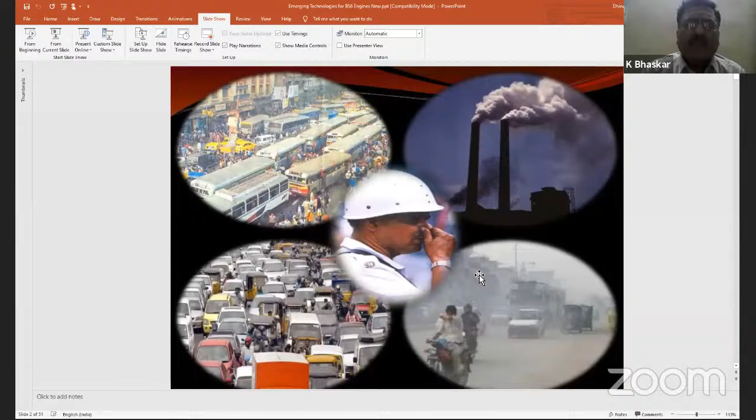It is not that only automobiles are giving pollution. There are a lot of industries also contributing, and the transport sector and places where combustion takes place are the main sources of carbon monoxide and oxides of nitrogen. So we don't want this. We are going to discuss how we can tackle this.

Before going into that, we must know what emission is. Anything which is not good for human beings, atmosphere, plants or animals, we call it pollution. Whatever pollutant comes out of the engine, we call it emission.

In SI engines, normally we have three major pollutants: hydrocarbon, carbon monoxide, and oxides of nitrogen. Please remember these three things. Normally oxides of nitrogen is denoted as NOx, meaning it consists of several oxides of nitrogen put together.

Then your diesel engine, the compression ignition engine, has one more pollutant extra: particulate matter, which is normally a solid form of soot. We can easily see black smoke coming out of the engine. When you see a public transport flooded with people, normally in the exhaust you will find black smoke. Why it is coming, we'll discuss.

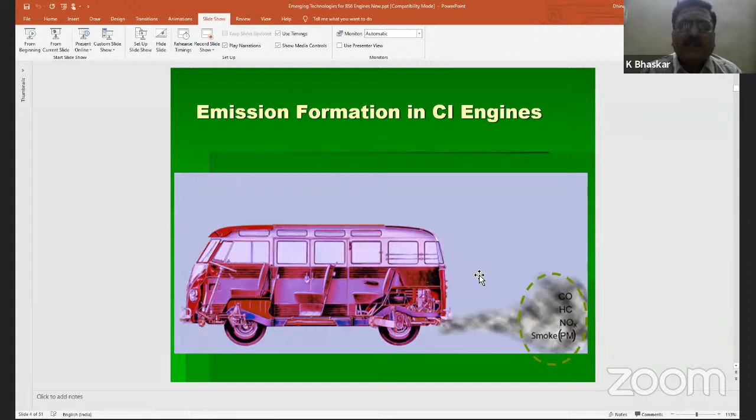Before going to that, what problem do these pollutants cause? Take carbon monoxide, the one culprit. We need oxygen - when we inhale oxygen, the hemoglobin in the blood is attracted towards it and carries the energy throughout the body. That is the purpose of inhaling oxygen.

When you inhale carbon monoxide instead of oxygen, or in combination, this hemoglobin in the blood has 200 times higher affinity towards CO than oxygen. That means instead of forming oxygen combined with hemoglobin, carbon monoxide will combine with hemoglobin to form carboxyhemoglobin.

It all depends on how much you inhale and how long you are exposed. When inhaling a small amount for a short duration, you will find a headache. With a large duration and large amount of carbon monoxide, it can go up to death. So it ranges from a small headache to death - please understand the significance of it.

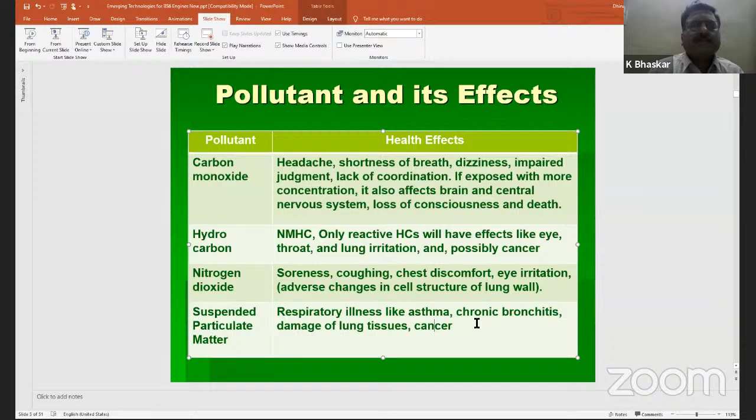As I said, particulate matter is a very, very dangerous component depending upon the size. When I say PM10, PM10 will be filtered in the nose's upper trap itself. PM2.5, when the size reduces to a quarter of it, then it can go to the lower respiratory tract. Then PM1, it will go to the alveoli - that is the lowest, smallest component which is available in our lungs. To that extent, it will go.

So when it goes very close to the smallest component, you will have a large amount of particulate matter of PM1 size. Then you will find part of the lungs will not be in active mode, so your respiratory system will not be functional to the expected level. Furthermore, PM0.1 will create a lot of problems which can go through the blood, and it can go to any part of the body.

To understand its effect, this is your human hair - human hair has 50 micrometers. Particulate matter of 2.5 - please understand the size of human hair versus particulate matter, it's very, very small. So when it goes into the body, it will have a lot of issues.

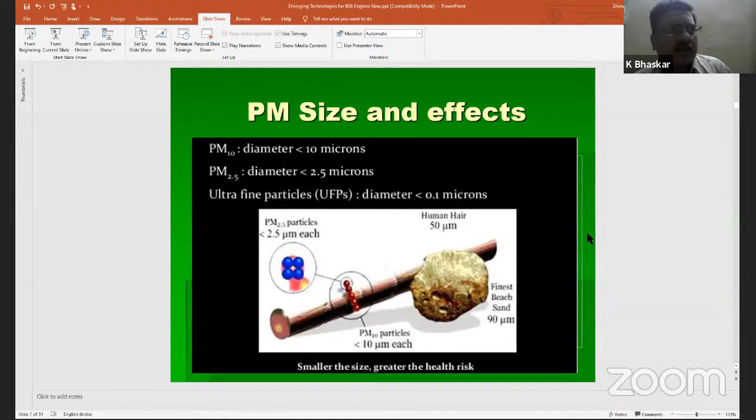Normally, who will be more affected? The traffic constables - traffic constables who are present in the traffic junctions, heavy traffic junctions. Normally the people will be on a rotational basis because they are the worst people affected by means of particulate matter.

On a whole, what happens throughout the world - the emission concept first popped up as the concept of emission control. Everything comes out in 1952.

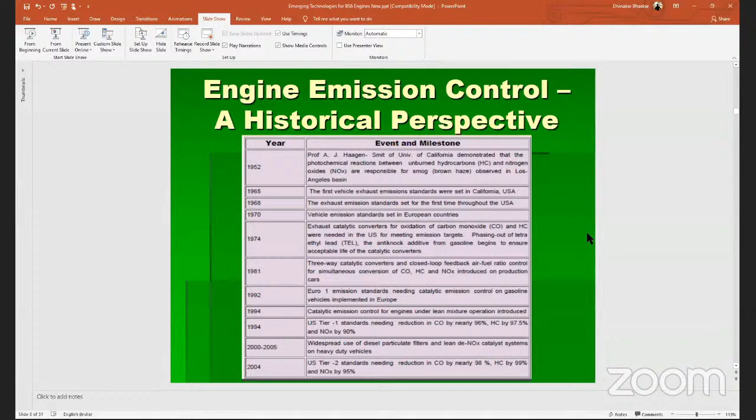1965, USA came out with the emission standards. Later, it started its journey to a greater extent. In India, it is around 2000, right? India 2000 is the year in which we implemented BS1, which is very close to Euro 1.

And you must know why we call it Euro 1. In the world, there are three major countries that formulate emissions, and all other countries will follow it, right? One country is Europe, another is US, and one more is Japan. We are following European standards, and we slightly modify them to follow the Euro norms based on our conditions.

Please understand, step by step only we have applied the emission norms. For example, Euro 2 was introduced in 2001, but only in Delhi, Mumbai, Kolkata and Chennai - the 4 major metropolitan cities. Later, 13 cities were identified, plus these cities. Then in 2005, Euro 3, the 13 cities plus Delhi implemented Euro 3.

The remaining part of India used Euro 2. In 2010 only, Euro 3 became nationwide. So please understand, only when we implement a new emission standard, it's first in the selected metropolitan cities, and we see the success. Then after seeing the success, they implement it all over the country.

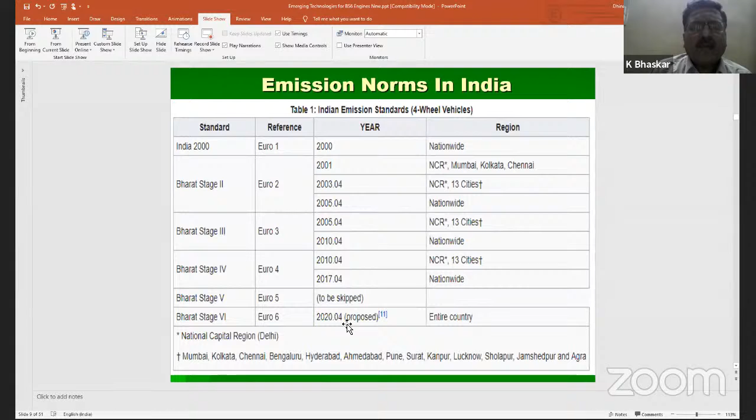One information you should know is Euro 5 we have skipped. Euro 4 is introduced in 2010. By 2015 we must have been in a position to introduce Euro 5, but the government and the manufacturers decided to work together and formed a committee, and they decided to implement it in 2020 nationwide, not in selected cities. From 2020 onwards, Bharat Stage 6 norms will be implemented.

So what is this norm? If you look at it, there's no big change in BS4 and BS6 with respect to CO and HC. But NOx is reduced. There is a new term coming up in petrol engines: particulate matter and particulate number. Please understand, there is a new terminology entering the emission norms from BS6 onwards.

Particulate matter for petrol vehicles - earlier, particulate matter was implemented only for diesel vehicles. Till BS4, we don't have particulate matter for petrol. Now only we have introduced particulate matter. And particulate number - the size, we should not go beyond this. That is also another parameter, the size as well as the quantity. Both are introduced because...

...for achieving Euro 6, one technology in petrol engine is GDI. What is GDI? Anybody? What is GDI? Gasoline direct injection, sir. Yes, gasoline direct injection. What do you mean by direct injection? We are injecting the petrol directly into the combustion chamber.

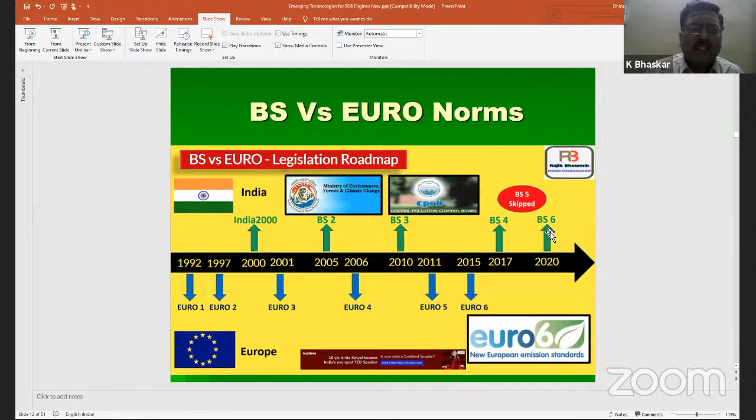Sometimes they may say 0, 0. The day may come, I don't know.

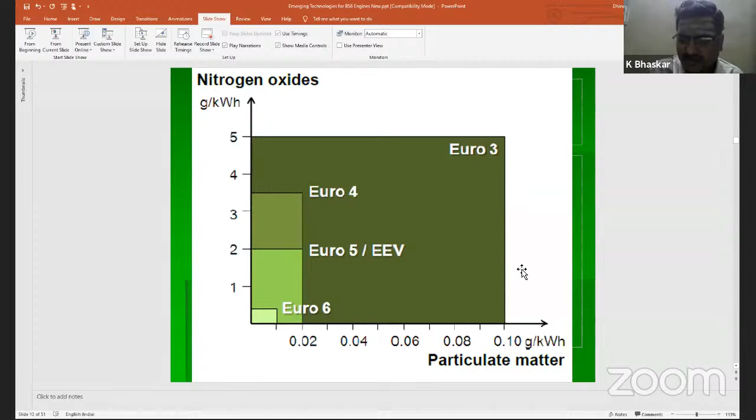This is again where we stand - that also you can look at from this. BS6 and Euro 6 are almost the same. There is no big variation, all the values are same. That is to ensure we are meeting the Euro 6 standards.

How is it tested? Have you tested your vehicle's emission? Have you taken an emission control certificate - anybody, two-wheeler or four-wheeler?

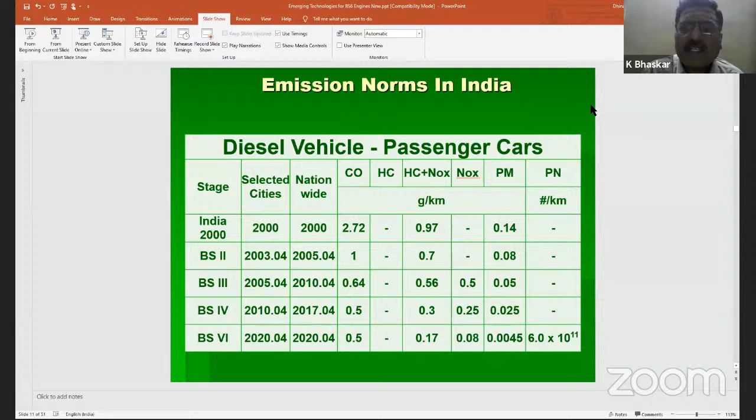In the petrol bunks also you can measure, and that will be an idling emission. That is no way connected to this. Please understand, that is no way connected to this. Right? That is what I am trying to say.

We are taking every detail from the European countries. European countries have their own roads. If you look at a highway, how many vehicles are flying on the highway? What type of vehicles are flying? How many two-wheelers, how many four-wheelers? What signals do you have? What is the driving pattern of the drivers? What is the maximum speed achieved on the road? You may have a vehicle that will go up to 200 kilometers per hour, but are you riding it on Indian roads? That will be different.

So statistical data will be taken into account—how the driver drives a vehicle on the road. A lot of statistical data is considered. How much, say when you take your vehicle from home to the office—you will start with idle, then accelerate, then have signals idle, then accelerate, maintain the same speed, then decelerate. All this acceleration, deceleration, hot idling, cold idling, all those things will be taken into account.

All this information will be put into the software, and this software will give you a driving pattern—the driving pattern of a driver for a particular vehicle. That is the driving pattern, which we call the driving cycle. On the x-axis we'll have time, and on the y-axis we'll have speed. Speed versus time. Is that clear? What does this driving cycle represent?

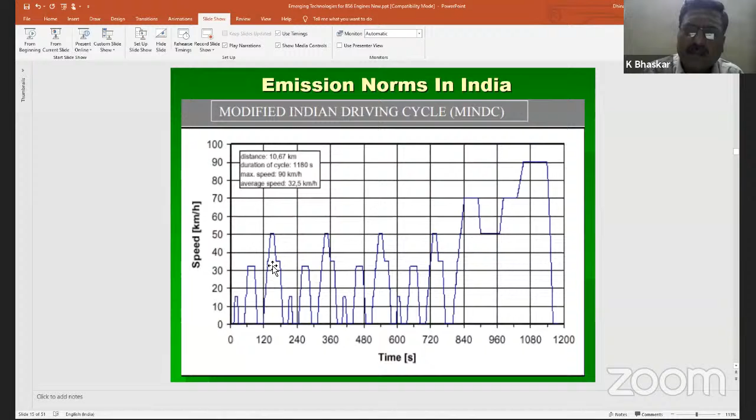When it goes at very high velocity, wind resistance comes into play. The same wind resistance will be offered by a vehicle cooling fan. The road will be represented as drums—these wheels represent the road. Here the vehicle will be fixed and the road will be moving. Are you able to understand?

Yes sir. Right. Now, as usual, how you run on the road, the same way the driver will be sitting inside the vehicle and he will drive it. You play a lot of video games, right? There will be a track given, like in an F1 race game—a lot of vehicle racing games. The same way, this pattern will be your driving cycle. The driver will carefully drive according to the driving cycle.

And the tailpipe will be connected to the emission analyzers and samples will be taken continuously. Are you able to understand? So when I say grams per kilometer, that means it is tested not on the road, but in laboratory conditions. Is that clear? Any questions you want to ask?

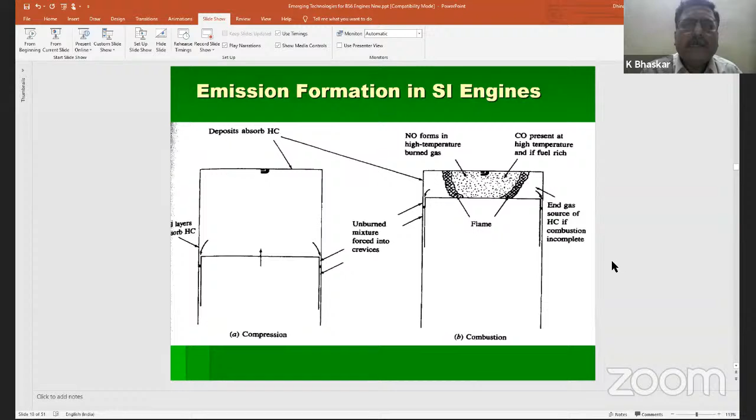Okay, now can we move to the next step? Yes sir. Okay, now I'm going to concentrate only on the CI engine. This is the SI engine, that doesn't waste much time. But one thing you should be able to understand between the SI engine and CI engine is NOx formation.

NOx is what? Oxides of nitrogen. It is called oxides of nitrogen. In general, there are seven different types of oxides of nitrogen combinedly called NOx in the air pollution segment. But in the vehicular segment, it is only two oxides of nitrogen—one is NO, the other is NO2, nitric oxide and nitrogen dioxide. These two are considered as pollutants from engines.

If you look at the SI engine scenario, 98% of NOx is NO only. When I say NOx in SI engine, it is only NO. Only 2%, that too at a maximum condition, NO2 will be 2%. Is that clear? Yes, sir.

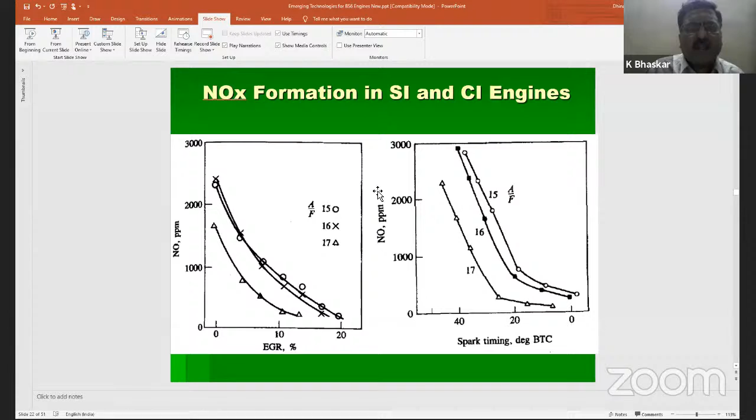Yes, sir. Okay. Now, NOx can be controlled by EGR. I will come to this graph a little later.

CO. See, CO fundamentally - what is the air fuel ratio I said for petrol engine? Stoichiometric air fuel ratio, just now I said, 14.7:1. Very good, 14.7:1. How does the engine operate? Very close to that air fuel ratio.

CO emission - see, in diesel engine, what will be the air fuel ratio? Anybody can guess? What is the overall air fuel ratio? Stoichiometric air fuel ratio of diesel is 15:1. Approximately 15:1.

But the operating air fuel ratio for a diesel engine at no load condition and low speed conditions, you will find even 100:1 to 80:1. That means 100 parts of air and 1 part of fuel. In full load condition, it will have 20:1, overall air to overall fuel that comes into the system. At high load conditions, it is 20:1. At low load condition, what is the value? 100:1.

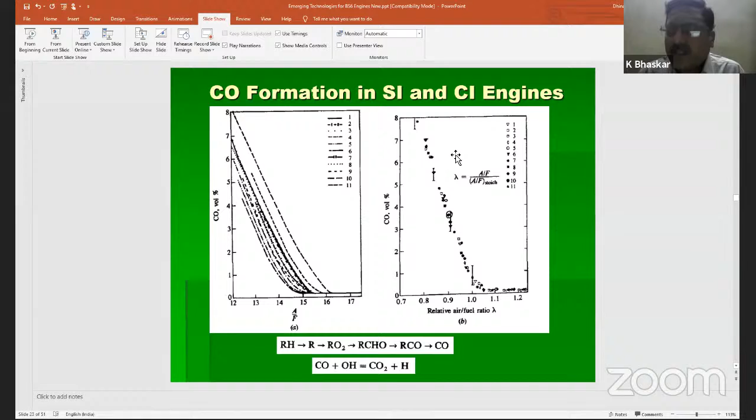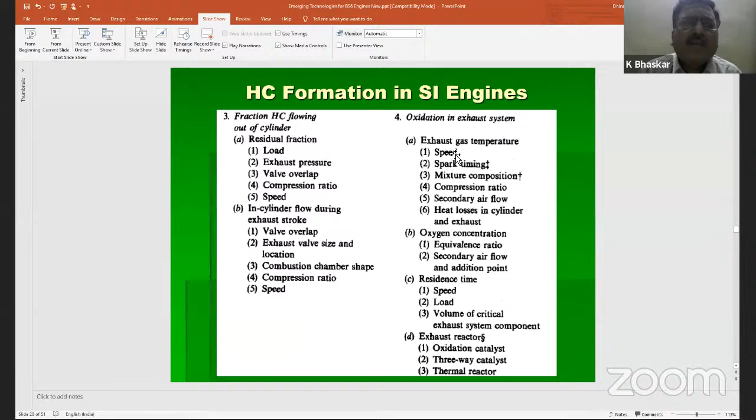If at all that is a mismatch, then definitely you will find hydrocarbon in the exhaust. Is that clear? The CO emission with respect to SI and CI engine - these are all very interesting points, but I don't want to discuss now.

Normally, minimum - see, atmospheric pressure is 1 bar. Please understand, atmospheric pressure is 1 bar. The fuel which comes out of the injector is 200 bar minimum. For mechanical injections, we can go up to 1000 bar. What is the range for mechanical injection? 200 bar to 1000 bar. That means 1000 times higher than the atmospheric pressure.

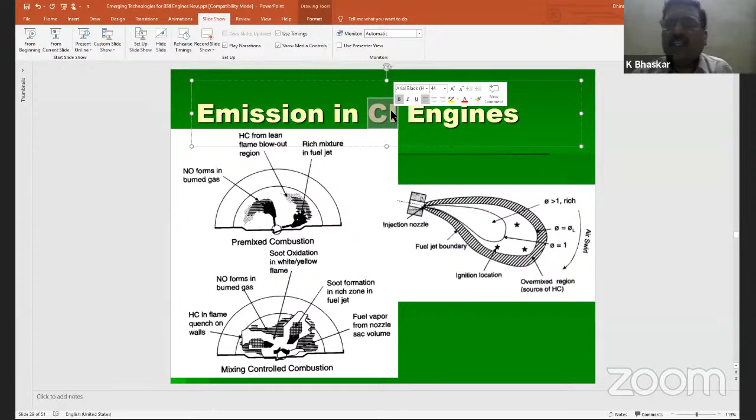So please understand, I am compressing it well above the self-ignition temperature of the fuel. I need to increase the temperature of the air well above the self-ignition temperature of the fuel used. That is why I am heating up to 700 degrees centigrade. If you want 700 degrees centigrade, you need a high compression ratio. That is why your CI engine will have higher compression ratios compared to SI engines. In SI engines, we use a spark - spark will do that purpose, it will heat and rise above the self-ignition temperature. Here, only compression is the source. Is that clear? So surrounding air will have 700, 800 degrees centigrade.

Through that, the fuel sprayed, so somewhere you will have a homogeneous air fuel mixture. This homogeneous air fuel mixture takes heat from the surrounding air, rises up to the self-ignition temperature, and burns. When it burns, it will have a flame, and over a particular point, the flame starts. It will try to propagate in all directions. The flame has a natural tendency to propagate in all directions. Am I right or wrong?

Are you able to see the stars here? These stars are very near to the stoichiometric air fuel ratio. This is the place where combustion starts, meaning the flame starts. This flame will try to propagate in this direction as well as this direction. When it goes towards this direction, you will have only a very less amount of fuel, so combustion will start, and intermediately it will stop.

So intermediate means unburned or partially burned hydrocarbons will be formed. When it goes towards this direction, you will have a rich fuel zone, only fuel. But this flame is having 2500 degrees centigrade, so it will try to decompose the fuel. That is why soot is formed. Are you able to understand this?

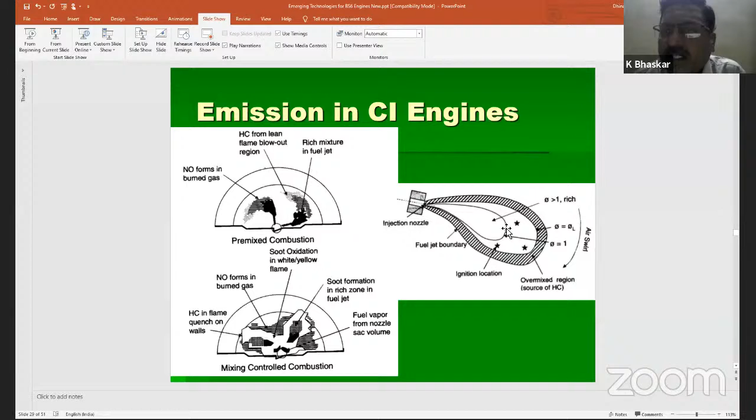This is how soot is formed. I am not going into the depth.

Okay, now we'll come to the control strategies. Now we know what is emission, what emission standards are, what emissions come out of engines - we discussed that. Then we discussed BS6 norms, how it is measured, and how the pollutants are formed. So far we have discussed these things. Now we will discuss how we can control these emissions.

There are only two important things we can control: in-cylinder control or after-treatment devices. There are two things.

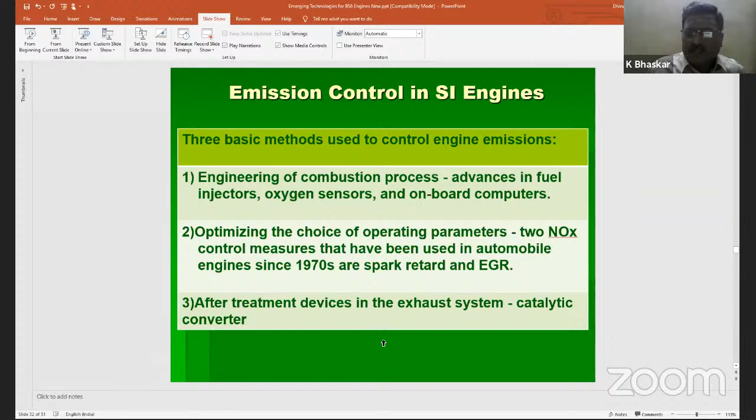Now directly we'll go into the BS6 norms. How much time is available till now? It's 3:30. Still I have another 30-40 minutes. I'm a little slow in explaining things. Can I proceed? Yes sir, we'll continue, we'll proceed.

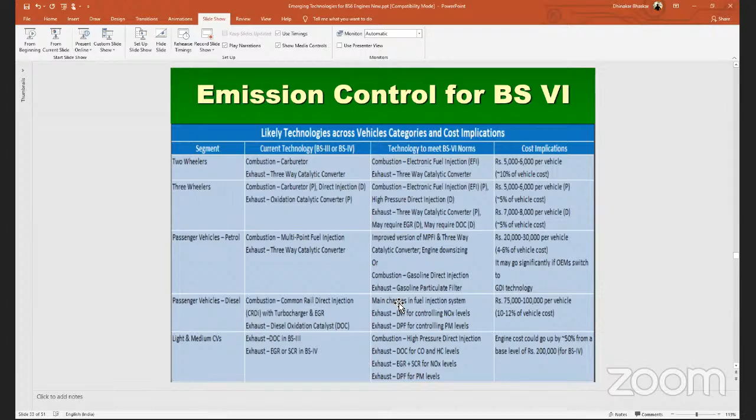See, we'll concentrate only on diesel vehicles. So, can I zoom it? These are all the technologies for BS4. In BS4, the combustion system is common rail direct injection, CRDI. We have a turbocharger, we have EGR, and in the exhaust we have a diesel oxidation catalyst. These are all the technologies available in the BS4 vehicle itself.

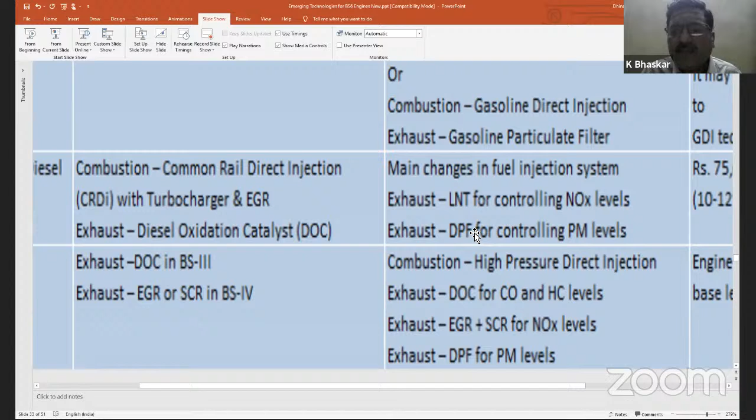Now, when you go to BS6, the same CRDI is used, but with changes in the fuel injection system, which we'll discuss. In the exhaust, for BS4 it is only diesel oxidation catalyst, but now we are going to have a DPF, diesel particulate filter, then LNT, lean NOx trap, for NOx control. All these are new things which are coming out, so please understand that.

Before going further, one more thing is required parallelly. When you implement Euro 6 vehicles on the roads, you must get Euro 6 quality fuel. Only then can you ensure Euro 6 emissions on the road. The quality of fuel must be enhanced too. The major difference between BS4 and BS6 fuel is that sulfur content is reduced 5 times, from 50 ppm to 10 ppm now. So slowly we are getting Euro 6 or Bharat Stage 6 fuel, with a lot of onboard diagnostics.

Earlier we used to have only very important things. Now we have a lot more, checking whether SCR is working properly or DPF is working properly. All these things we can monitor with OBD now.

I already told you about driving cycles. Driving cycle experiments will be conducted in lab or on road. Driving cycle emissions are tested in lab or on roads.

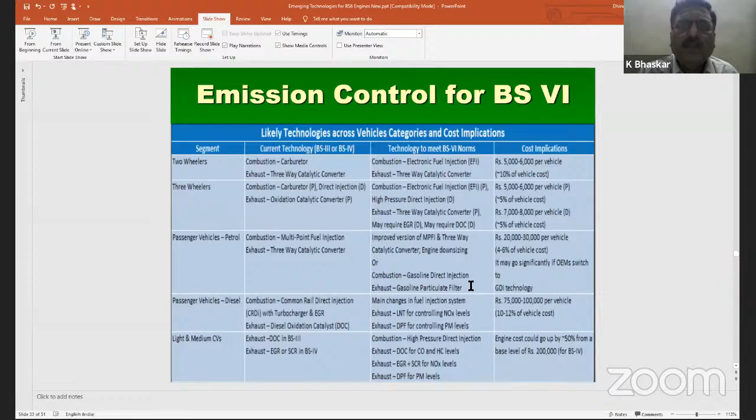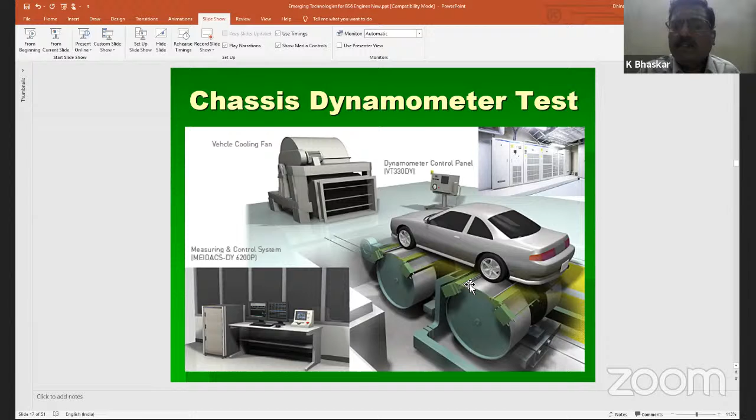This is how we are testing, right? Is it a road or a lab? Lab, sir. Here the road is represented by a roller that is rolling. The roller represents the road.

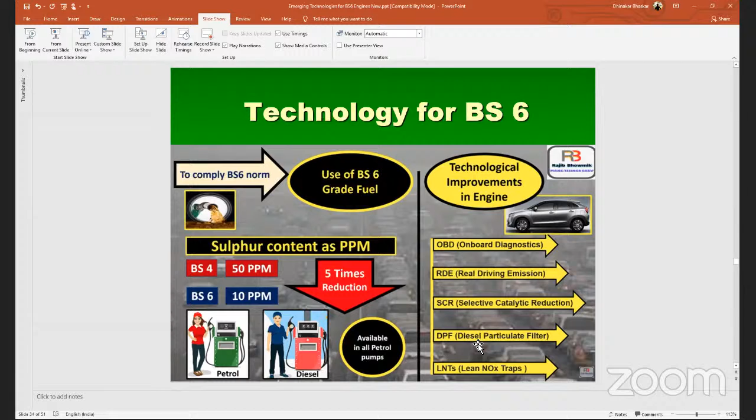for the emission vehicle manufacturers. SCR, can you repeat? Selective catalytic reduction, that is for NOx control. DPF is diesel particulate filter. LNT is lean NOx traps. All these technologies - SCR and LNT for NOx, DPF for particulate matter. Is it clear?

We'll see a little glimpse of these things. In the OBD, you will find all engines are now fitted with an electronic control unit. The ECU will have all the inputs. Sensors will give the input - you will have speed sensors, oxygen sensors, temperature sensors. Several sensors are available, and all give input.

Based on the sensor input, the ECU will actuate the actuators. Actuators mean the fuel injector is an actuator, valves are actuators - exhaust valve or EGR valve. So many places you will find actuators. The sensors give the signal, and based on the signal, the ECU will operate.

During this operation, if there is any fault, then the malfunction indication lamp, MIL, will show in the dashboard. If you are not able to correct it, you have to connect an external scanning tool. Each vehicle has a separate port where you can insert it and see what is really happening, what the problem is. This is OBD2 technology - OBD1 is outdated now. OBD3 is also being planned by everybody.

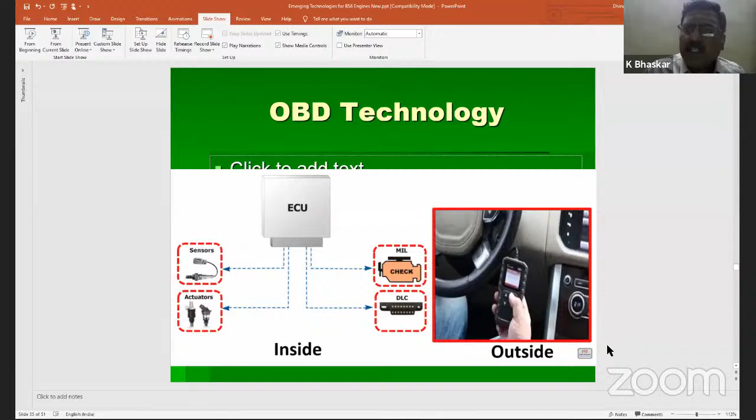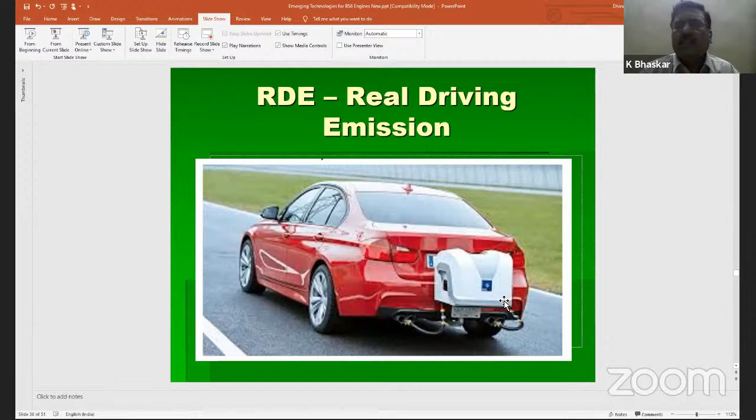Is that clear? Yes sir, that is a big change. In the first change I told you, you require BS6 fuel. Second change, OBD2 and 3 technologies. Third is RDE, real driving emissions.

Then common rail - what advances do we now have? Just to have a glimpse, what is the pressure with which fuel is injected? In a diesel engine with mechanical injection, the pressure is 200 to 1000 bar.

Now, when I say electronic assisted mechanical injection, that is the common rail diesel injection system, the fuel pressure rises up to 2500 bar. In Indian roads we already have 1600 bar, but the maximum pressure went up to 2500 bar in CRDI. Now we are increasing the pressure.

What is the advantage of increasing the pressure? When I increase the pressure, the droplet size is reduced. I already told you air is heated by means of higher compression ratio, up to 700 degrees centigrade. Now we are injecting the fuel, and the injection pressure decides the size of the droplet.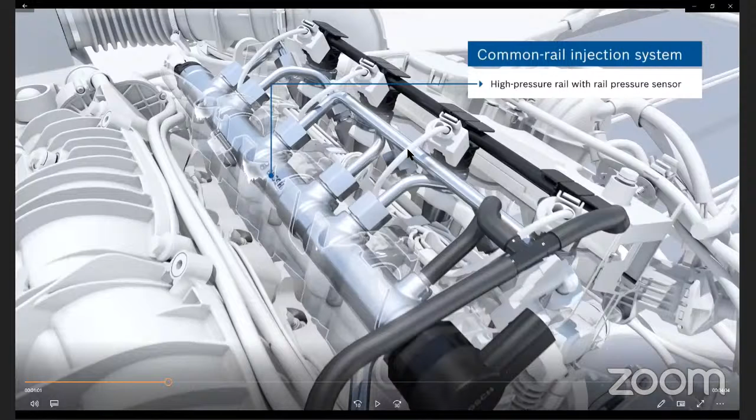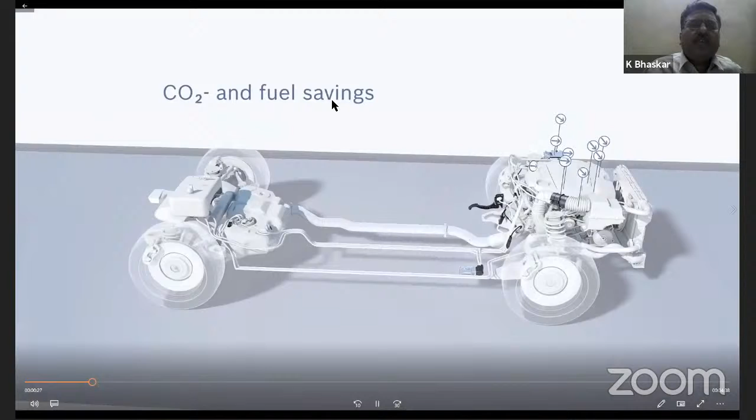So this is the common rail engine. It's highly efficient, so fuel savings. Fuel savings will come with CO2 emissions savings also. So increased volume - volume is there? No volume is there.

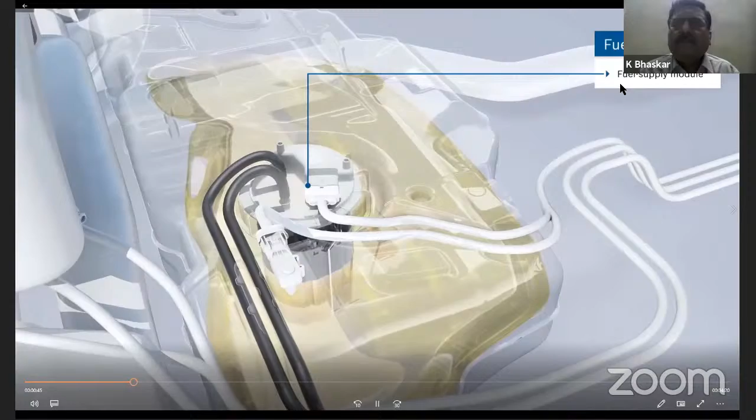Okay, this is a fuel injection pump. There will be a sensor. There is a high pressure pump which is operated at 2500 bar, called a CR pump. This is the high pressure common rail.

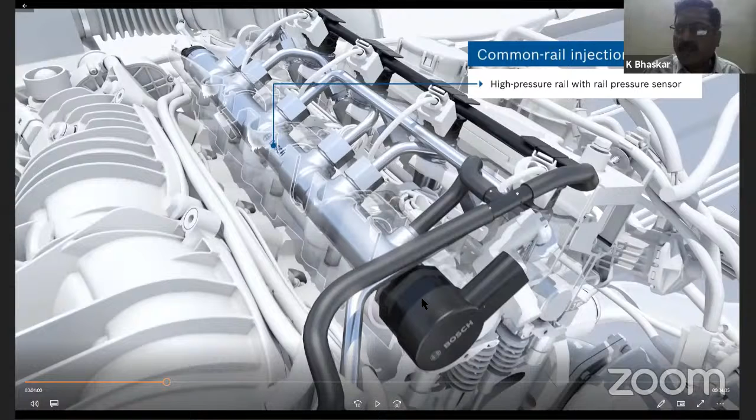The major advantage of common rail is it is independent of engine speed. Mechanical systems are dependent on engine speed - when engine speed is low, we cannot expect high injection pressures. But here, we can able to expect any injection pressure even at low operating speeds.

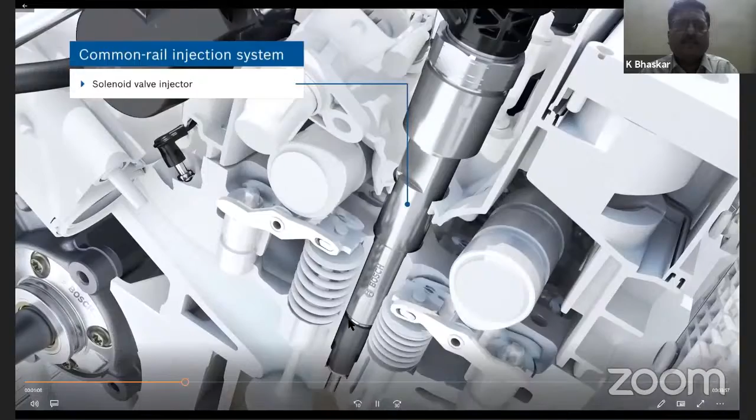This is the injector - solenoid valve injectors. Piezo electric pressure transducers will be there. So it is operating at 2500 bar. Can you see the injection? Yes sir.

This itself is a very nice thing. But what happens now? This is your ECU.

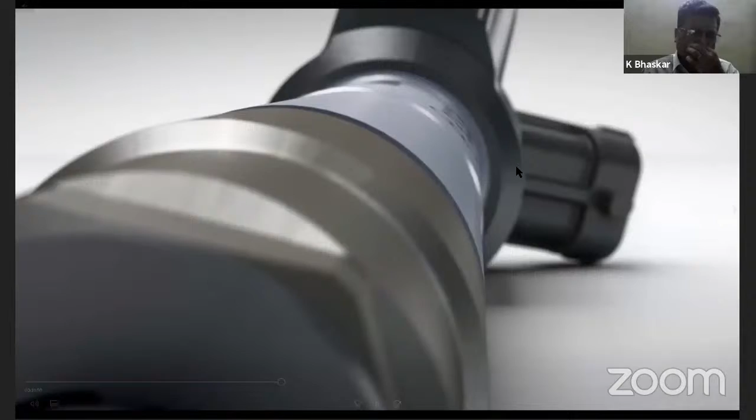Injector. Can you see now? Pre-injection, main injection, post-injection. Yes, sir.

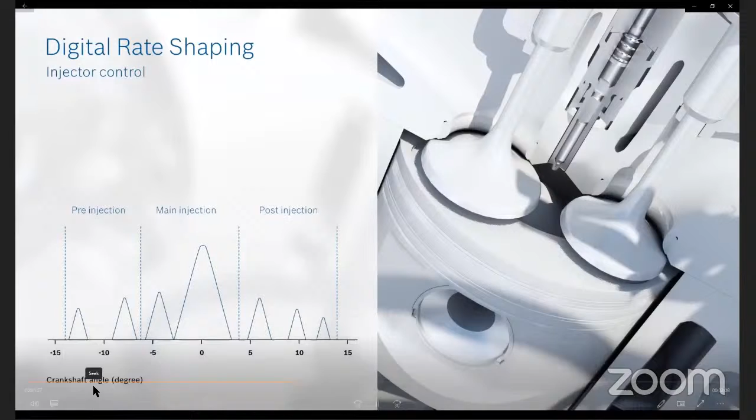Now, can you see parallelly? You should see this graph as well as this injection, then only you will understand what this is. Are you able to see? Within one cycle, I am going to inject 1, 2, 3, 4, 5, 6, 7. Seven times I have injected.

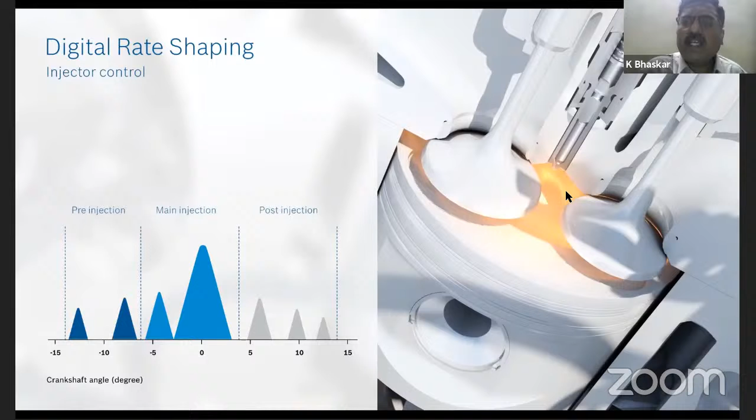Nine times it is possible. That means normally 1 millisecond is 1 by thousandth of a second. So here, everything happens within 2-3 milliseconds. Look at the genius precision with which Bosch is manufacturing CRDI systems. Please understand and appreciate.

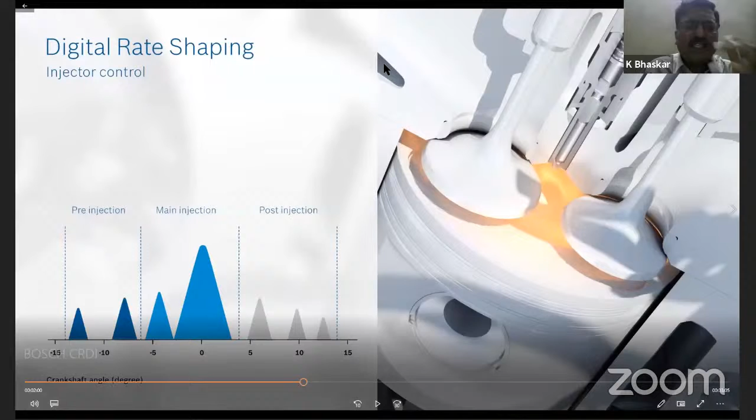We can talk one hour about CRDI itself, so with this thought process, I just open out the process so that you can go further into it. Now again I have to share this screen. Is it visible? Yes, sir. Now, this CRDI system will reduce NOx emission, CO emission, soot emission — everything can be reduced, right?

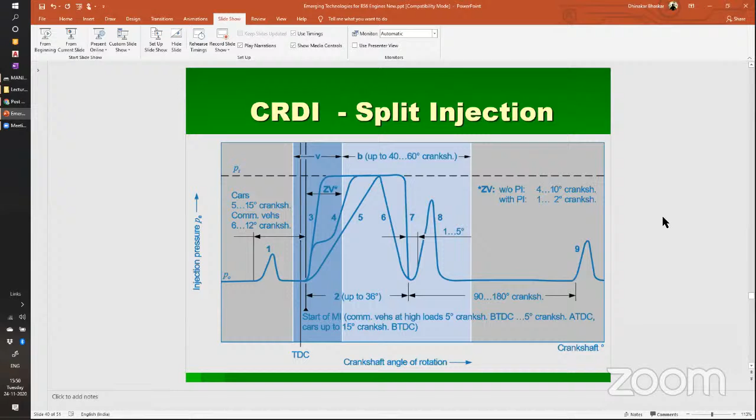Now next is exhaust gas recirculation. What does EGR mean? Part of the exhaust, through a control valve, goes into the intake manifold. What is the use? Say for example 10% of the exhaust is circulated into the intake manifold. Already burned charge is now going into the intake manifold along with the fresh air. What is the advantage?

Why is NOx formed? I told you three things, at least two things you should remember. What are those? When will NOx be formed? High temperature and availability of oxygen, am I right? Yes, sir. Both things, high temperature as well as availability of oxygen, will be disturbed when you go for EGR.

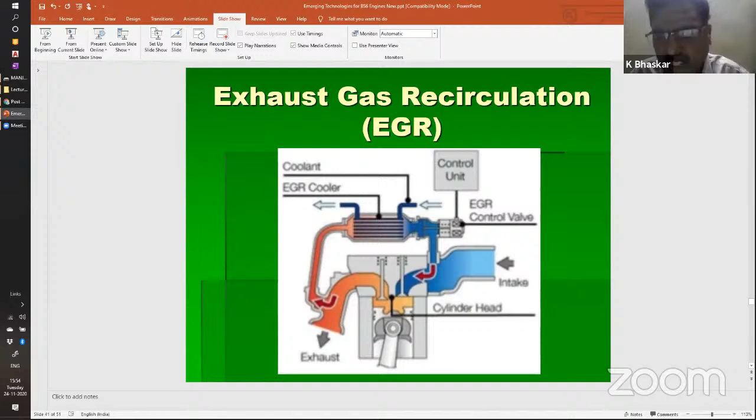When it goes directly, it is called hot EGR. When it is cooled by means of a heat exchanger, it is called cooled EGR. Now people are working closely with cool EGR, which further reduces NOx emission. Is the difference between hot EGR and cool EGR clear? Yes, sir.

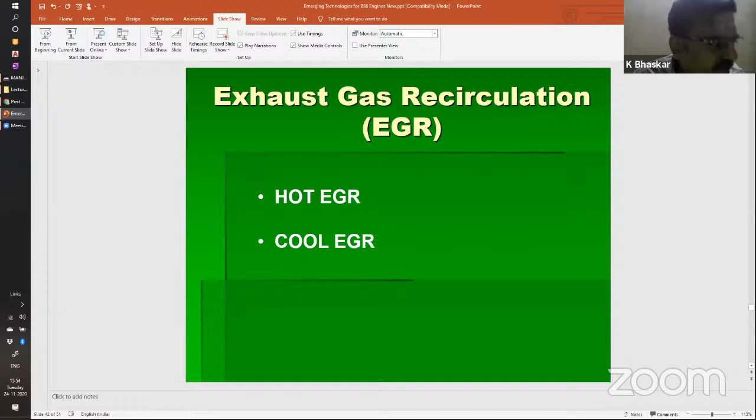Now there's one more concept emerging, which is HCCI combustion — homogeneous charge compression ignition engine. Earlier I told you what is the latest technology for SI engine — GDI. What is GDI?

Gasoline direct injection engines, now it is HCCI. Earlier it was only a heterogeneous system, now it becomes homogeneous. Just like a petrol engine, I am going to prepare a homogeneous air fuel mixture and compress it. So please understand, here only air.

This is a diesel engine. What happens? In the diesel engine, air is inducted inside the engine during the intake stroke and it is compressed. Air is compressed well above the self-ignition temperature, and the fuel is sprayed. Here in petrol engine, homogeneous charge is prepared and is compressed to a little value, then spark plug will initiate the combustion.

Here I am going to combine these two. I am going to prepare a homogeneous air fuel mixture, and I am going to compress it to well above the self-ignition temperature, and combustion will initiate instantly. That is a homogeneous charge compression ignition engine. What is the advantage?

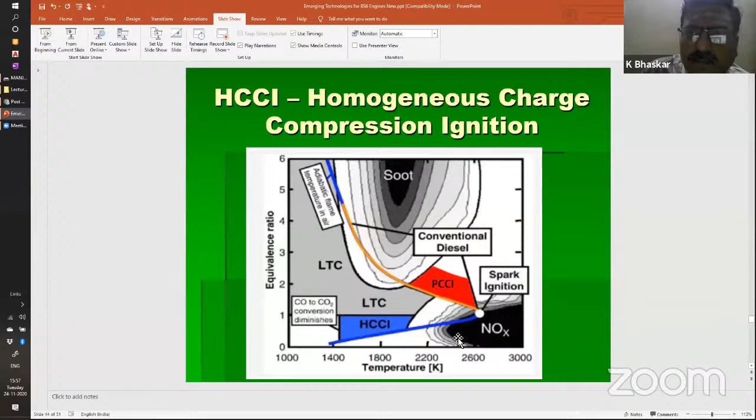But up to 75% load, we can operate the HCCI engine very efficiently, and we can reduce the emissions to a very, very low value, both NOx as well as soot. Is it clear? Okay, now we'll go for the after-treatment device.

Before going to that, I'll again play a small video, a 2-3 minute video, so that you will understand what it is.

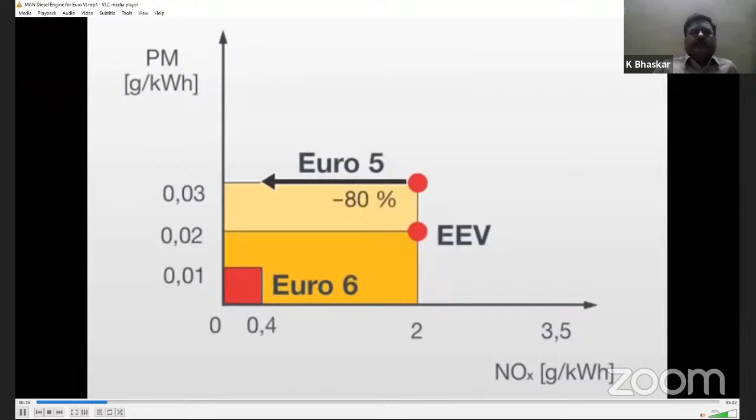2014, all newly registered vehicles must meet the requirements. In comparison with Euro 5, Euro 6 sees a reduction in NOx emissions by 80%, and a reduction by 66% in particulate emissions.

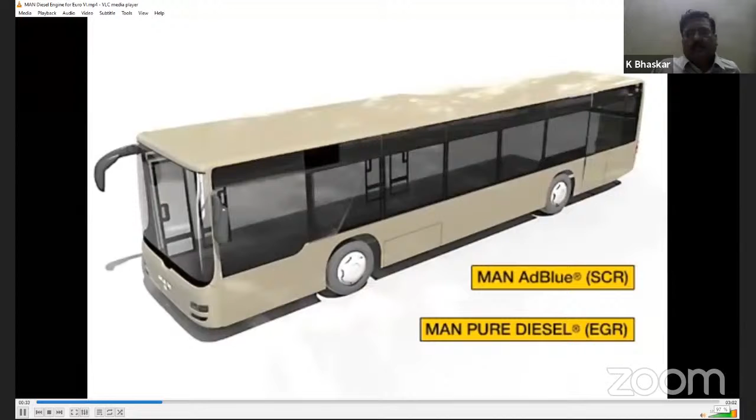Emission control technologies: pure diesel, EGR, and MAN AdBlue SCR are technologically combined for the environment-friendly Euro 6 diesel engines. A new feature of the MAN Lion City is the use of the additional operating fluid AdBlue for nitrogen oxide. Please understand what is this. Can anyone read?

AdBlue tank - it is nothing but urea. It is an exhaust fluid, diesel exhaust fluid, DEF. Just like your diesel and lubricating oil, you will have one more tank, that is the AdBlue tank for SCR technology, right? You have to fill that also. Is that clear?

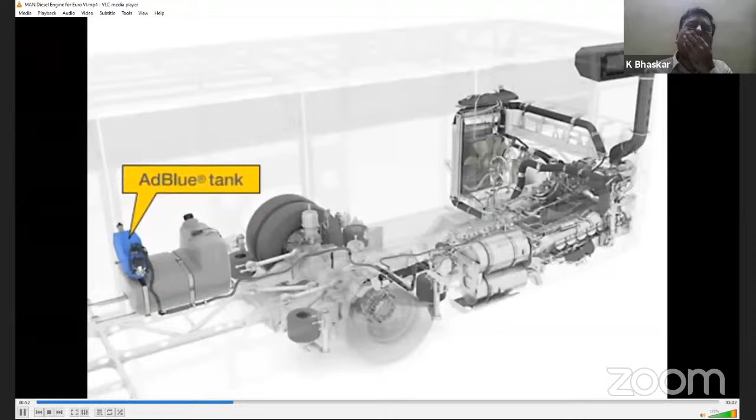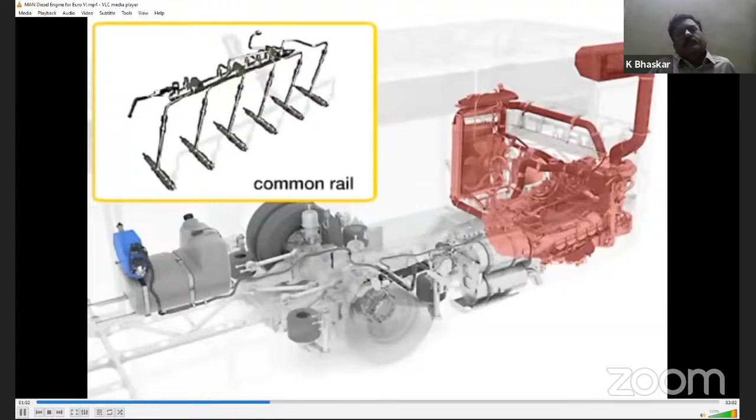Sizes for the non-toxic and non-hazardous urea solution are matched to the diesel tank volume. The fully developed MAN engine technology features common rail fuel injection, regulated exhaust gas recirculation (EGR), and two-stage turbocharging.

Now, what is this turbocharger? Turbocharger in 2 stages, right? What is the advantage of 2-stage turbocharging?

A lot of advantages are there in two-stage turbocharging. When you are having a fixed turbocharger, we'll have performance issues. Turbo is a rotary machine which will operate efficiently only for a particular bandwidth. If the bandwidth is increasing from a lower value to a higher value, then your system will not be efficient. So low pressure turbine, high pressure turbine - normally low pressure turbine will be in operation, and whenever the speed is high, then high pressure also comes into existence. So at all operating points, the turbocharger will be efficiently giving air. That is the idea. Is it clear?

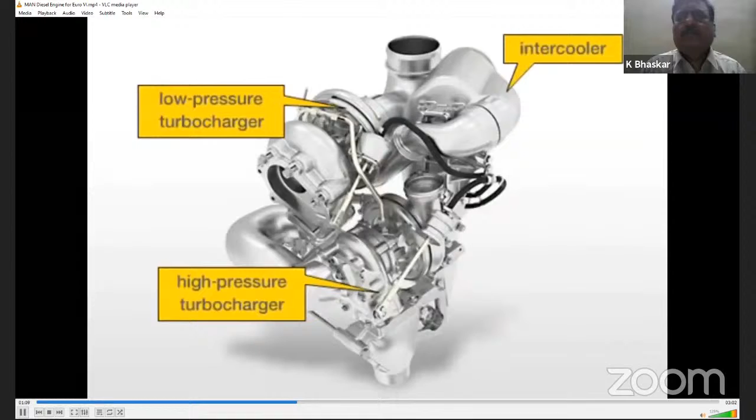There is no turbo lag. This will be supplemented by the new SCRT system. So what is this? SCRT is equal to CRT plus SCR.

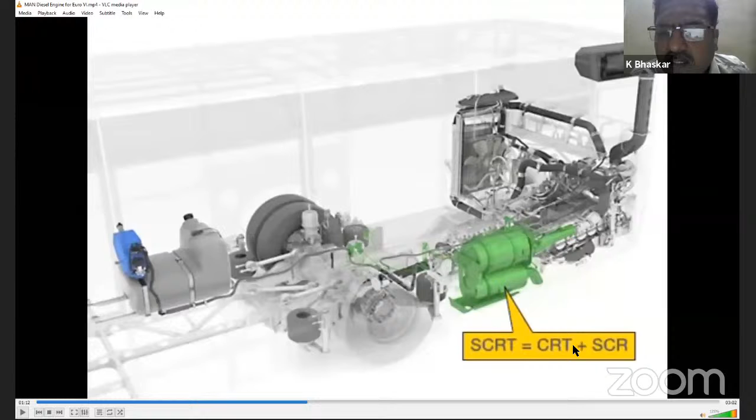CRT plus SCR - what is SCR? I just now told you, selective catalytic reduction. CRT is continuously regenerating trap, DPF.

The SCRT system is located in the two-stage exhaust silencer. It consists of the particulate filter, which has been enlarged in comparison with EEV, and the downstream SCR catalytic converters. The particulate filter features an electronic monitoring function that indicates when cleaning is necessary, and achieves a separation rate of up to 99%.

So what is this particulate filter? I told you, the soot particle - in diesel engine emission, the soot particles will be trapped inside, just like a coffee cup. A coffee cup, how much coffee you can pour? A jug of coffee, how much you can pour?

How much can you pour? Is my question clear? We have a large quantity of coffee, and I am having a small cup in my hand. How much coffee can I pour into the cup? It is up to the cup's capacity, right? Yes. If it is beyond that, what will happen? It will spill. Am I right? Yes, sir.

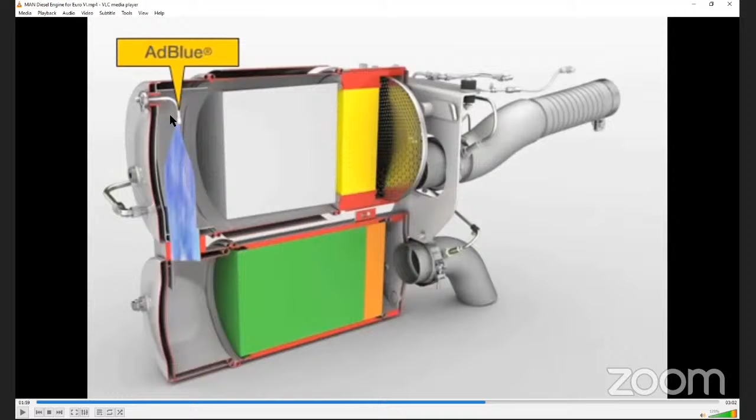We need ammonia, but ammonia is a poisonous gas. We want to store it as ammonia, but urea is a little easier for us to carry, because even for agriculture we use urea, right? Human urine is also urea only, right? That is not a dangerous thing, but ammonia - we need only ammonia. Please understand, we need only ammonia, but we use an AdBlue fluid which contains urea, right?

Please look at it. After the yellow color, which is the oxidation catalyst, it goes to the diesel particulate filter, then the exhaust gas enters into the green color, which is the SCR catalyst. Before entering the SCR catalyst, this gas will mix with the AdBlue fluid.

The injection takes place after the particulate filter. Ammonia is produced from the urea in the SCR catalytic converter module, enabling subsequent chemical conversion of the nitrogen oxides into the harmless substances nitrogen and water. Are you able to understand?

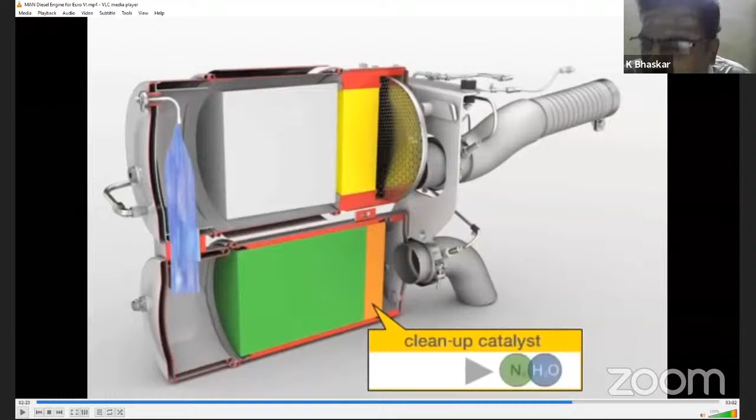Yes, yes. The catalytic converter prevents it - see, this is the cleanup stage. Sometimes, if you supply a little excess ammonia, then this ammonia will not be consumed by the NOx, right? Less NOx is available, more ammonia is there - this is what we call ammonia slip. This slip should not happen. If it happens, then this orange color converter will convert that also.

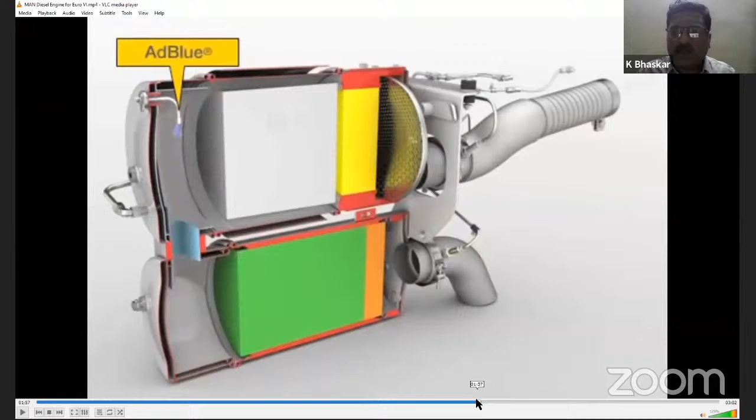It consists of the particulate filter, which has been enlarged in comparison with EEV, and the downstream SCR catalytic converters. The particulate filter features an electronic monitoring function that indicates when cleaning is necessary, and it achieves a separation rate of up to 99%. The system is continuously regenerated by oxidation of the soot particulates retained in the filter material into gaseous carbon dioxide. The particulate filter is therefore largely maintenance-free.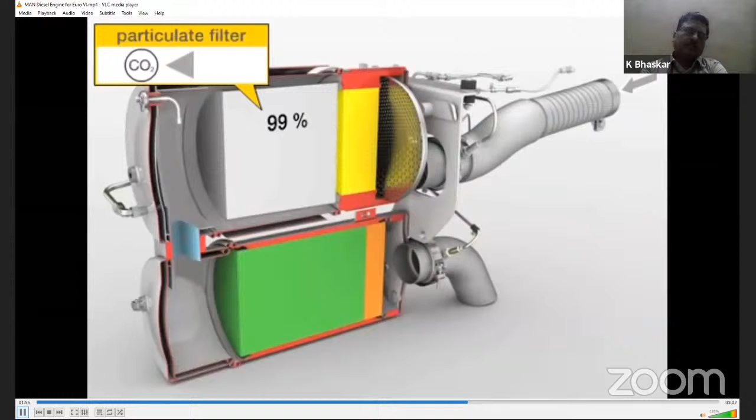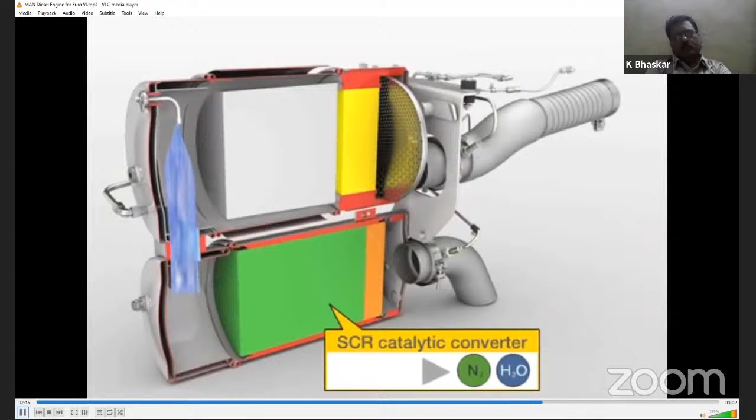Demand-based injection of the AdBlue urea solution takes place after the particulate filter. Ammonia is produced from the urea in the SCR catalytic converter module, enabling subsequent chemical conversion of the nitrogen oxides into the harmless substances nitrogen and water. The ammonia oxidation catalytic converter prevents emission of excess ammonia, so-called ammonia slip. MAN is... Is that clear? Yes, sir, yes, sir.

Now look at this: DOC, diesel oxidation catalyst, then DPF, then DEF. I have already told you what DEF is - this is exhaust fluid, that is your AdBlue. Catalyst, again final catalyst, then it goes to the exhaust.

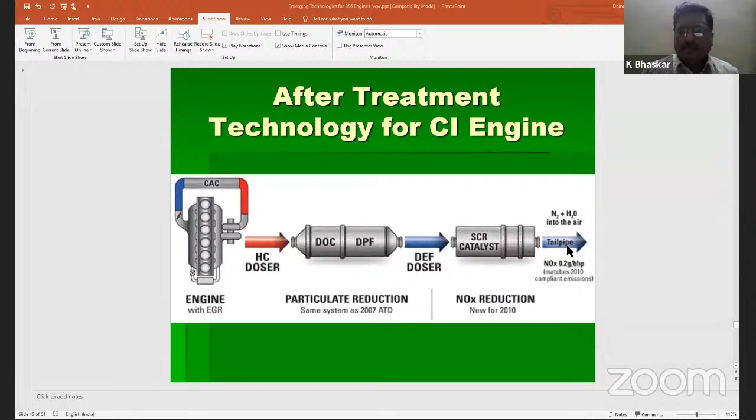So this is what happens in the SCR, right? The waste gas and urea will go together. It will form NO plus NH3, ammonia, in the presence of oxygen, and it will be converted to N2 and water vapor.

Then the diesel particulate filter. There's a special material which will be available at high temperature also, it will withstand. Ceramic substrate will be there, and the passage will be like this. When it goes inside, through the porous medium, these gases will go, right? Only the particulate, soot particulate, solid particles will be trapped here.

So you find there is one trap here, one more trap here. The difference in pressure is always maintained. When the back pressure exceeds a particular value, that means the particulate trap or particulate filter is full, so you need to regenerate.

There are several ways of regeneration. One is we can inject more fuel, we can operate in the rich mode, so that it will burn out all the things, or electrically you can heat it. There are several such technologies available. Once it is regenerated, automatically you will find the next cycle it will be ready.

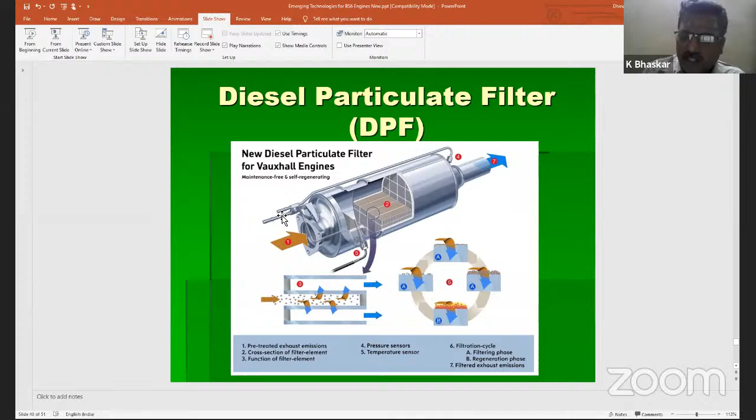Diesel oxidation catalytic converter is used for conversion of CO and HC to CO2 and H2O. Now it is also used to convert NO into NO2.

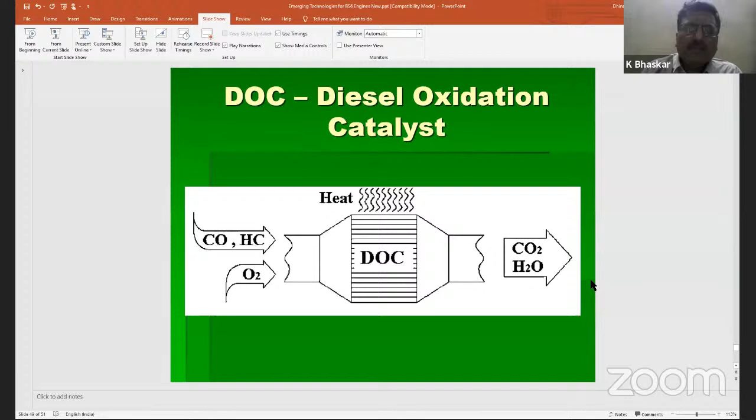But the screen is not visible, sir. Video screen. Immediately a three-way catalytic converter works... Sir, screen is not visible. It's visible? Okay sir, now it's visible. Yes sir, now visible sir.

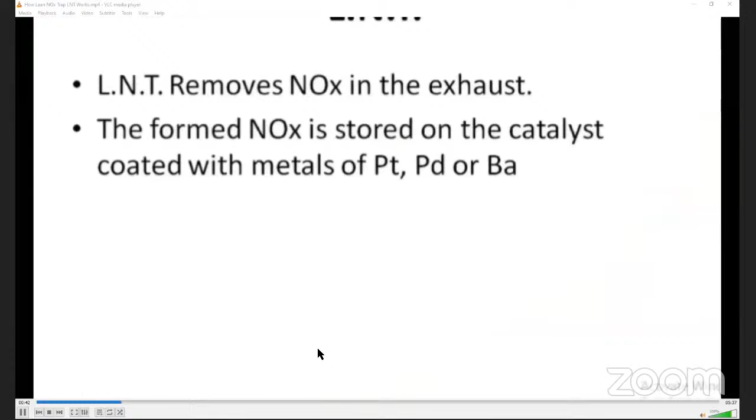The result of lean NOx trap is very much different from a three-way catalytic converter. So slightly increase the volume, sir.

Okay, now please look at it. This is also like a catalytic converter. Lean NOx trap, just like particulate filter. Particulate filter traps what? Particulate matter, right? So same way, lean NOx trap - the name itself says what? It will trap...

LNT, Lean NOx Trap, means what? It will trap the NOx, oxides of nitrogen. Okay.

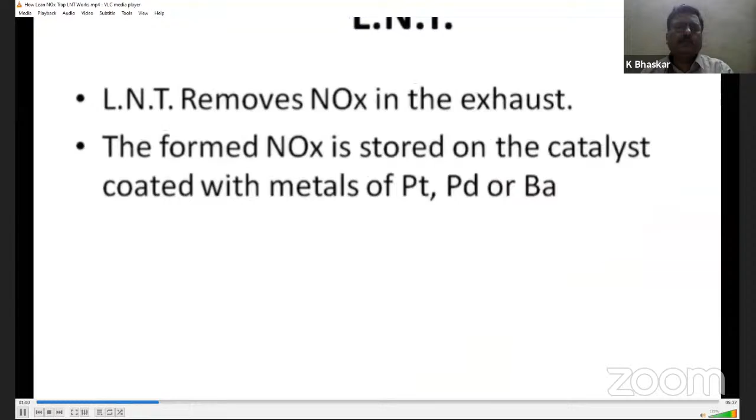A very much different way. Lean NOx trap removes NOx in the exhaust. The formed NOx is stored on the catalyst coated with metals of platinum, palladium, and barium. Platinum and palladium for oxidation, barium also for storage - here we are storing the NOx in a metal rather than direct reducing. So the working has two stages: the first stage is done when the engine is running with a lean mixture, and it will proceed to the second stage when the engine turns to a rich mixture zone, where the fuel content is higher than the stoichiometric mixture.

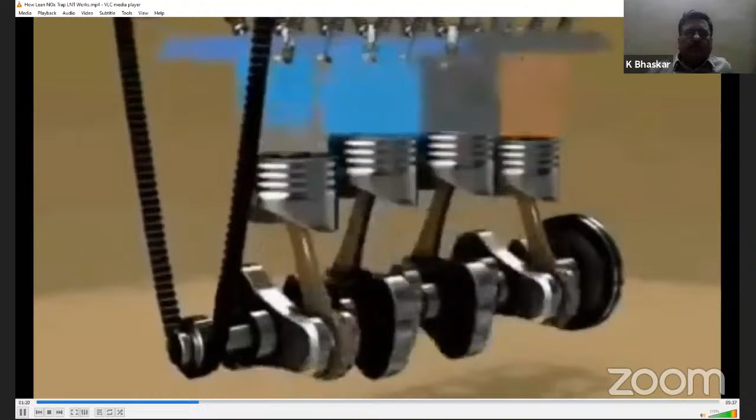Let's look at how the conversion process happens in an LNT device. These are the reactions taking place in the lean NOx trap device. First, the NOx will be converted to nitrogen dioxide - all the NOx will be converted into NO2. In the engines we deal about NO and NO2; we don't bother about NO2, but NO has to be converted into NO2. That is the first step, and that is why we have a diesel oxidation catalyst, which will cater to this oxidation also.

It will react with barium carbonate to form barium nitrate and carbon dioxide. Then it will react with carbon monoxide and hydrocarbon to produce carbon dioxide, free nitrogen, and barium carbonate, just like the initial state. The first two reactions happen in a lean mixture form, and the last reaction happens in a rich mixture form. I will explain in detail how it works.

So listen, what is the platinum's role? What is platinum? I told you, platinum is the oxidation catalyst. Platinum, palladium for oxidation, rhodium is for reduction. The platinum will convert all the NO to NO2.

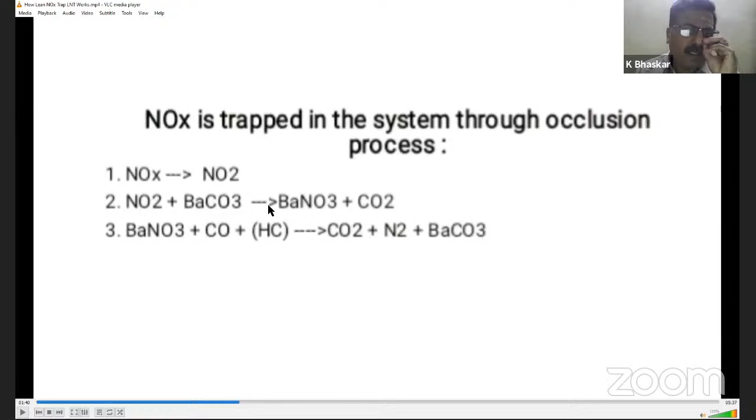Once NO2 is formed, this NO2 will react with the barium carbonate - we already know, NO2 and barium carbonate, these two will mix, there's a metallic compound. This metallic compound will form barium nitrate plus CO2. CO2 is a gas, so it will leave, and NOx will be stored in the form of barium nitrate. Is that clear?

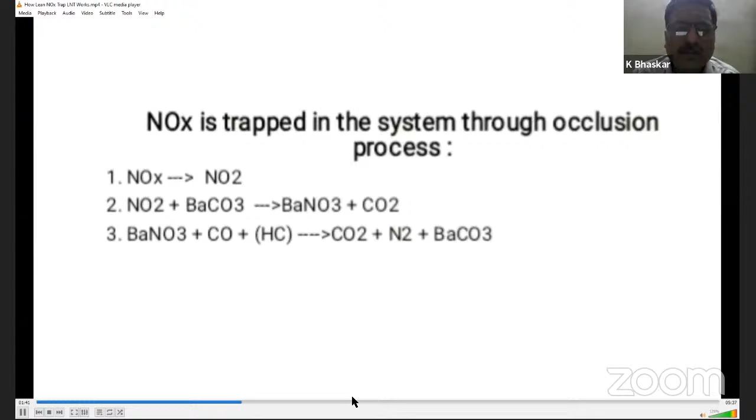Its job is to convert the nitrogen monoxide into nitrogen dioxide, so then the absorption process will start. There is barium oxide in barium carbonate, so the barium carbonate will react with the oxides of nitrogen to start the absorption process. The barium carbonate will absorb the NOx and emit carbon dioxide, and there will be free oxygen if there is enough oxygen there.

In the absorption process, barium carbonate is now converted to barium nitrate. NOx is absorbed. There is a capacity for this substrate also. It is not possible to keep on storing, just like a coffee cup, which can handle only a small quantity of coffee. Same way, this absorption capacity of barium carbonate is also limited.

So again, we need to regenerate the surface once it is reaching the saturation limit. We get complete conversion when all the barium carbonate gets converted into barium nitrate, so the process will be complete. Now it is impossible to absorb any more NOx that is produced during the combustion process, so it will lead to higher emissions.

To prevent this from happening, we have to convert the barium nitrate into its initial stage, which is barium carbonate, to absorb the NOx. For this, we have to switch the engine to a rich mixture stage for converting the barium nitrate to barium carbonate. So we have to switch over to the rich state, right? So we need carbon for that.

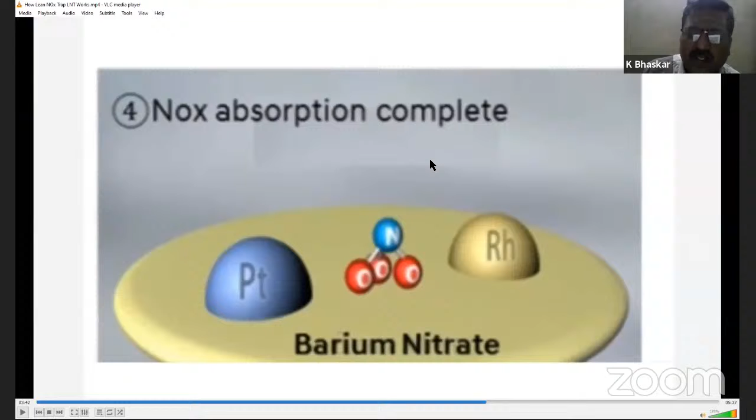With excess fuel, the exhaust will have hydrocarbon, which is unburned fuel, and there will also be carbon monoxide. The barium nitrate will react with the hydrocarbon and carbon monoxide to become barium carbonate, just like the initial state. So when you operate at rich operating conditions, you will have hydrocarbon and carbon monoxide. This hydrocarbon and carbon monoxide will react with the barium nitrate and form barium carbonate, just like the previous reaction.

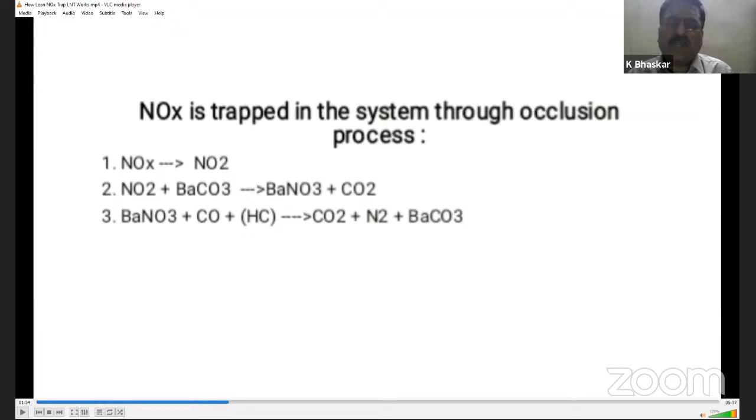Barium nitrate plus CO and HC will form CO2, N2 and barium carbonate. In the process, NO2 will be totally removed. Initially, all the NO2 will be converted and stored in the form of barium nitrate. Once the storage capacity is over, rich mixture will be supplied to the engine for a short duration, where regeneration will start. It will become N2, and again all the surface will become barium carbonate. Now the surface is ready for absorption of the next cycle.

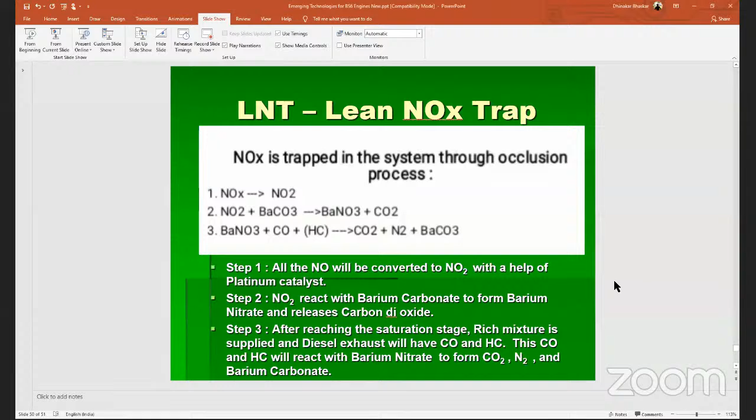Is that clear? Yes, sir. Yes, sir. Okay, my presentation is over.

I have concentrated only on CI engine. In SI engine, we have a lot of technologies which are available to go for BS6 norms.

Thank you, sir. It's a very nice presentation, sir, for explaining all the terminologies in the technologies related to BS6 norms. Your explanation in the videos will be very, very attractive, sir. Thank you, sir. So, Akshay, thank you. Okay, sir, any questions?

Dear participants, if you have any questions, kindly ask. I already took a lot of time, so students may not ask questions, I think. Sir, I have one doubt, sir. Yeah, please, thank you, Bhaskar. Lakshmi. Sir, Lakshmi sir, how are you?

Good evening. Very good, it was an interactive session, complete interaction. You are almost with the discussion with the students. Yeah, I joined always from 3 o'clock. I had a class from 2 o'clock. Yeah, I joined from 3 o'clock till now. Thank you, sir. So I have one small doubt, sir. Students are very nice, they are interactive.

Sir, is there any change in material related to engine in BS6? I'm not getting it, sir. Sir, in BS6 engine, is there any change of material from what is already existing in BS4 to BS6? No, you want to say material means engine component? Engine component, sir, engine component.